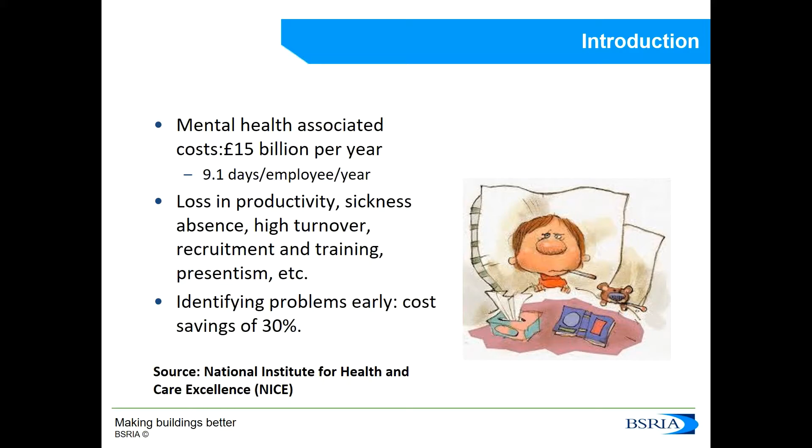The next item on the agenda is how buildings can affect our well-being. Building wellness can be categorized into 3 groups: functional, psychological, and physical. In the functional group, we have things like facilities, furniture, space, and layout. In the psychological group, we have things like being able to control the temperature, having a nice view, and having some greenery. And in the physical group, we have what we call indoor environmental quality.

Indoor environmental quality can be easily measured, and if we exclude the quality of water, which is obviously very important for our well-being, the main 5 components of indoor environmental quality would be noise, light, odors, thermal comfort, and indoor air quality.

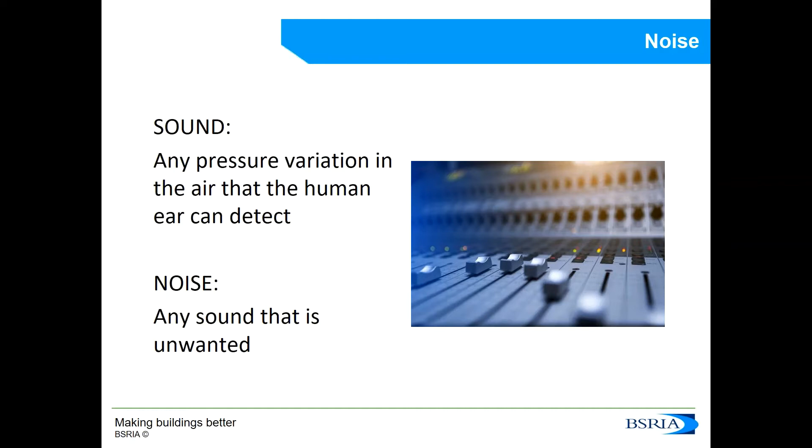So let's start with noise. My colleague Rebecca Hawk, our acoustic expert, will give a detailed presentation on sound next week, but very briefly, sound is any pressure variation that the human ear can detect, and noise is any sound that is unwanted. If we're exposed to high levels of noise at work, we could face hearing loss, multitasking becomes more difficult, we get stressed, and our motivation plummets. The World Health Organization has reported the cost of hearing loss in Europe at approximately £30 billion.

But when we are in an office environment, it is very unlikely that we're going to be exposed to really high levels of noise. So what matters in an office environment is the fact that our conversations and speech can be heard. We can become up to 66% less productive just because we're distracted by our colleagues. Of course, nowadays we could talk about being distracted by slightly different colleagues and how it affects our productivity.

There is a relatively new standard used to calculate two different acoustic parameters: the privacy distance and the distraction distance. The privacy distance is the distance from a source at which speech is no longer intelligible, and the distraction distance is the distance where speech is only partly intelligible but mostly contributes to the background noise.

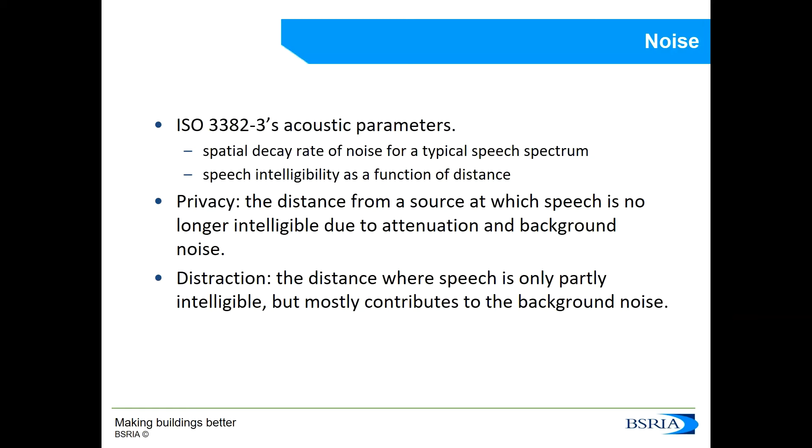Well, the next item on indoor environmental quality is light. When we measure light, we measure lux, which is the luminous flux per surface area. We do not always need the same amount of light; it really depends on the task we're doing. For example, the amount of light we would need in a loading bay is between 100 and 150 lux, and the light we would need if we were assembling a watch would be between 1,500 and 2,000 lux.

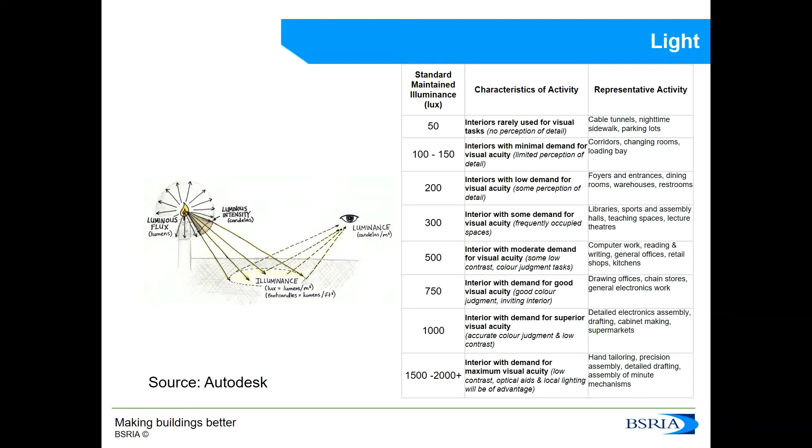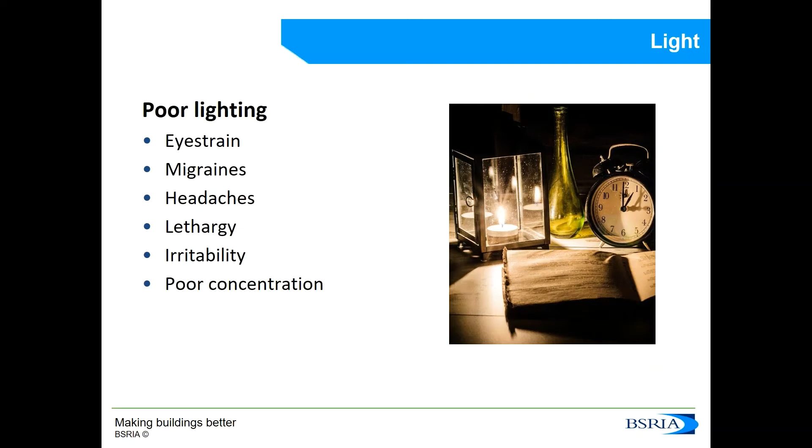If we have low levels of light, we would have eye strain, migraines, headaches, or irritability, and all of these will lead to poor concentration.

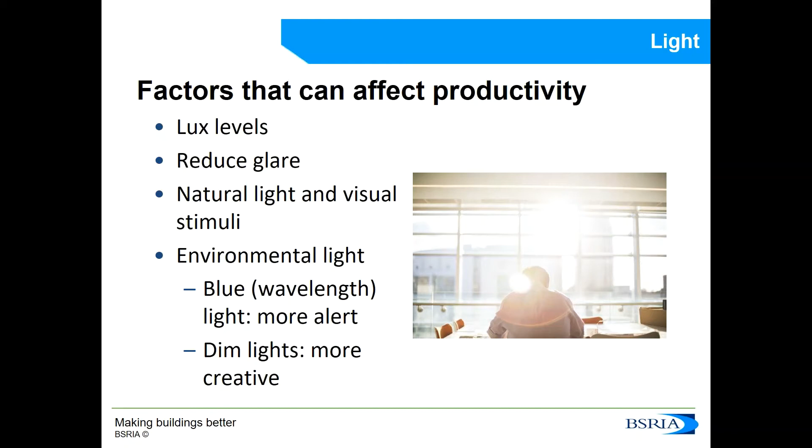So it's important to have the right lux levels in a space, but other factors are also important for our well-being, such as reduced glare, natural light, or visual stimuli. We can also use environmental light to match our circadian cycle. For example, blue lights can make us more alert, and dimmer lights can make us more creative or rested in the afternoon, ready to sleep and for the following day.

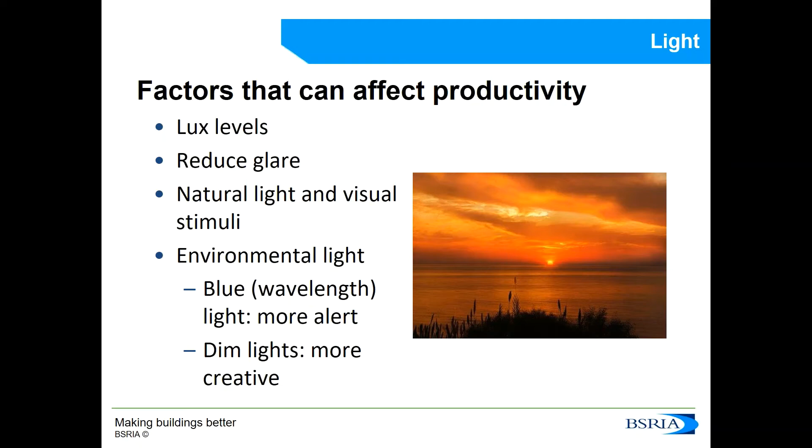The next component I'm going to talk about is odors. Odors are very closely linked to indoor air quality, and there is a way of measuring odors.

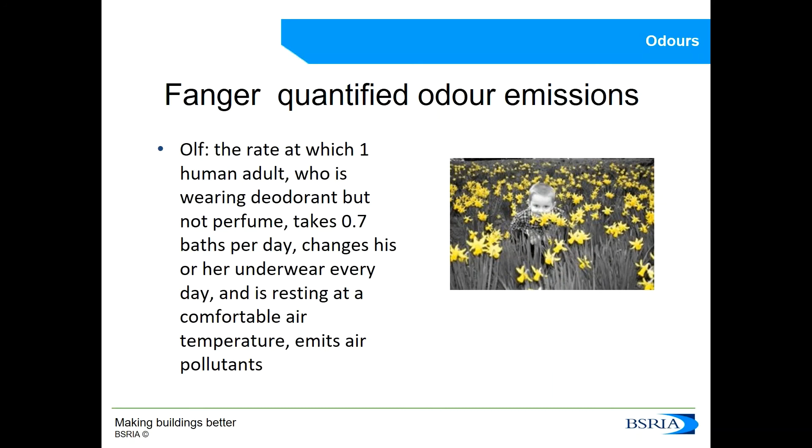Professor Ole Fanger from the University of Denmark worked a lot on thermal comfort and on odors, and came up with a new unit of measure, the OLF, which is the rate at which a human emits air pollutants. But this human has to have had 0.7 baths, wear deodorant but not perfume, and also be comfortable with the environment.

Odors are related to indoor air quality, and the way to deal with odors is to do a proper odor investigation if necessary, but it's also to have the right ventilation, as ventilation dilutes contaminants. You need the right levels of fresh air per person so that a room does not feel stuffy, and you also have to reduce the sources of emissions.

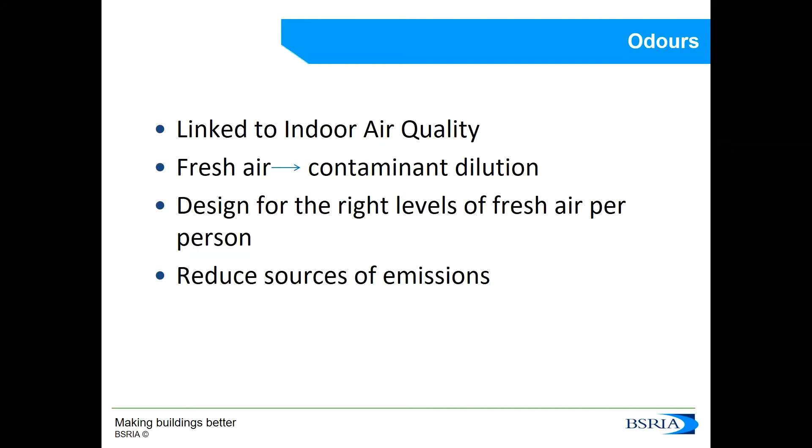The next indoor environmental quality component is thermal comfort. Thermal comfort is defined as that condition of mind that expresses satisfaction with the thermal environment. There are several standards to measure thermal comfort, also based on the work from Professor Ole Fanger, for example ASHRAE 55 or BS EN ISO 7730. ISO 7726 refers to the instrumentation needed for measuring.

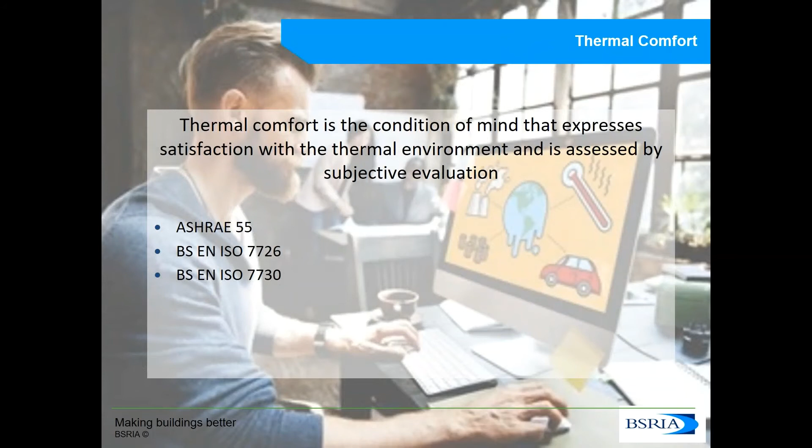So thermal comfort is a little bit more than measuring the temperature and relative humidity. You also have to have the airspeed, the turbulence intensity, the black globe or the operative temperature, and the calculations on thermal comfort also take into account the level of activity and the clothing levels.

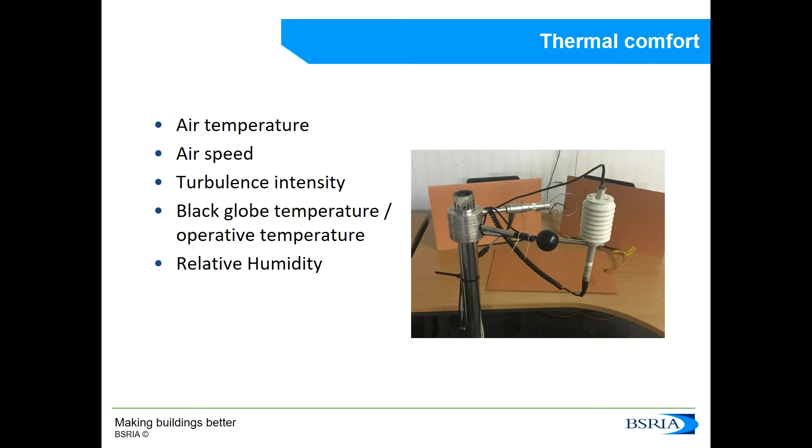So the thermal comfort results are three: draft risk, the predicted mean vote, and the predicted percentage of dissatisfied. Draft risk is the risk of a person feeling a draft.

The predicted mean vote is if I ask everybody in a room to vote how they feel with the environment, on a scale from -3 to +3, where 0 would be I feel quite comfortable in this environment, 1 would be I feel slightly warm, 2 quite warm, 3 extremely hot, and -1, -2, -3 would be slightly cold, quite cold, and extremely cold. If we put all those votes together, we would have the mean vote.

The advantage of these calculations is that they can be done before a building is built, for example in a mock-up environment. You can do several tests to decide what the right temperature would be, or what the right type of ventilation would be, to make the PMV as close to 0 as possible.

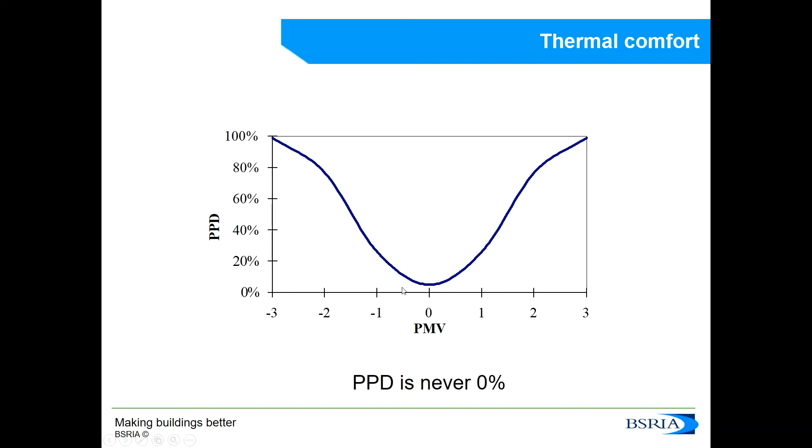Finally, the last component of indoor environmental quality is indoor air quality. Good indoor air quality is defined as air with no contaminants at harmful concentrations. This means that the air we breathe is not contaminant-free, but we have to make it so that the level of contaminant is not harmful to our health.

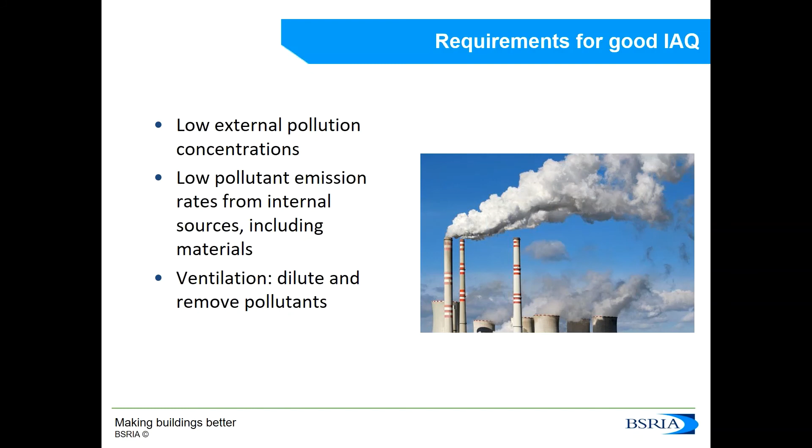To have good indoor air quality, we need a few things: low external pollution concentrations or filtering in the ventilation system, because air from outside comes through the ventilation system or even through open windows; low pollutant emissions from internal sources, for example materials such as paints, glues, new carpets or new furniture; and finally a good level of ventilation, because it can remove and dilute the contaminant concentration.

The 5 main contaminants that affect air quality can be classified as particles, gases, odors - again, as I mentioned, very closely related to air quality - volatile organic compounds, and biological contaminants, for example bacteria, fungi, mold.

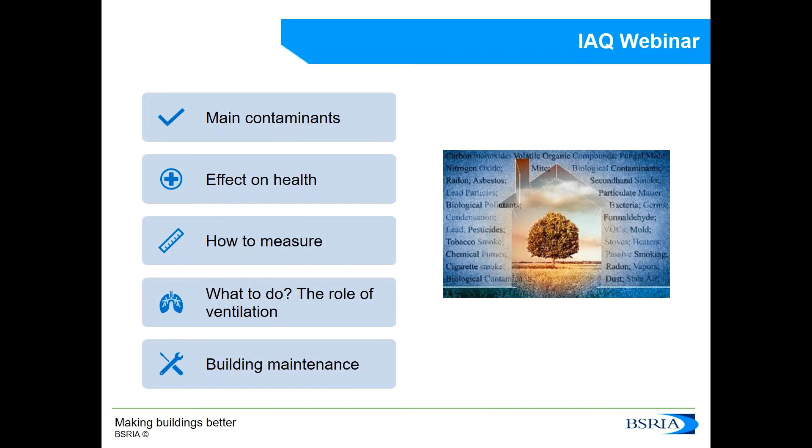So we have seen the 5 main components of indoor environmental quality.

To sum up this presentation, we have seen how well-being is made up of 4 elements: social, mental, physical, and work well-being. We have seen how buildings can affect our well-being, and that the 5 main components of indoor environmental quality are indoor air quality, odors, noise, light, and thermal comfort.